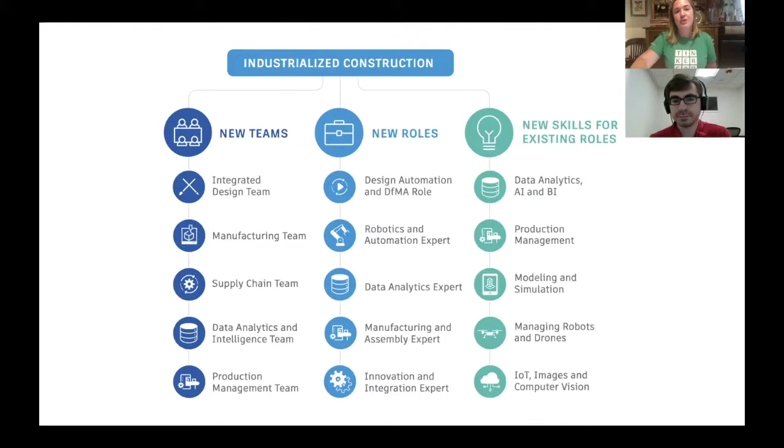Even one of the themes that is a consistent thread throughout this series is the idea of sustainability. So also how we can integrate robotics into the construction process in order to make it more efficient, but also to have less of a negative impact on the planet. Oftentimes we can do that and create less waste, for example, by doing construction in a more controlled environment, similar to manufacturing.

This is just some more information if you're interested in how the construction industry is reorganizing itself around teams. In the future, new roles will include the convergence of design and make - thinking about those BIM models that were designed in CAD that we looked at yesterday, and also thinking not just about the design of the building itself, but also the design of how all those different technologies are going to be incorporated in different stages of the construction process.

From the integration of robotics to thinking about managing the drones that might be monitoring the construction site for things like safety. So just thinking about an integrated plan for the whole process - a manufacturing team that might be working on creating components to buildings offsite, and then also the supply chain team would need to think about how you could move those components to the actual construction site, and also where we are sourcing the materials for the buildings we're creating.

The production management team - so again, those who might be collaborating with robots in order to make buildings, those who might be flying the drones, managing the drones.

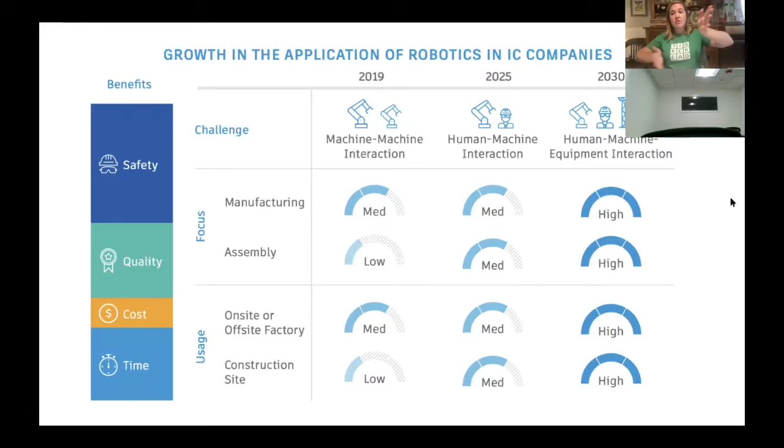By 2025, when a lot of you guys might be just recent graduates from college, there will be more human-machine interaction. So that skill of actually being able to collaborate with technology and with robotics, and collaborate even with automation, to see automation as a design partner, is something that is going to be important in the future. And then as we get into 2030, you see that a lot of these trends are actually becoming more commonplace, both on-site and off-site, both in the manufacturing pre-construction and also the assembly. In addition to that, thinking about ways that we can integrate robotics, humans, and some of the construction equipment itself, such as cranes, for example.

So I'm going to actually play Khalif's film now. This is from an earlier iteration of this series. Khalif and Russell again work together at Mass Robotics. Khalif is actually the director of education at Mass Robotics. So here is some of his broadcast from May.

We're beginning soon, but in the meantime, go ahead and start the warm-up activity: designing some kind of robot that would help you solve a problem in your life. It doesn't have to be a big problem, it can be a very small problem if you'd like. But the key is to find something specific that you think is better done when you don't have to do it. When Russell comes back, we'll continue to go over this warm-up activity as well. Also, I'd encourage you to write it down. Try to get good detail in there if you'd like, sketch it if that helps you. I'll be getting back to that later, so it's good to have that in advance.

Can you design a dishwasher? You can. Later on, we're going to talk a bit more about what is and isn't a robot, and does it even matter? So we'll be talking about dishwashers in particular.

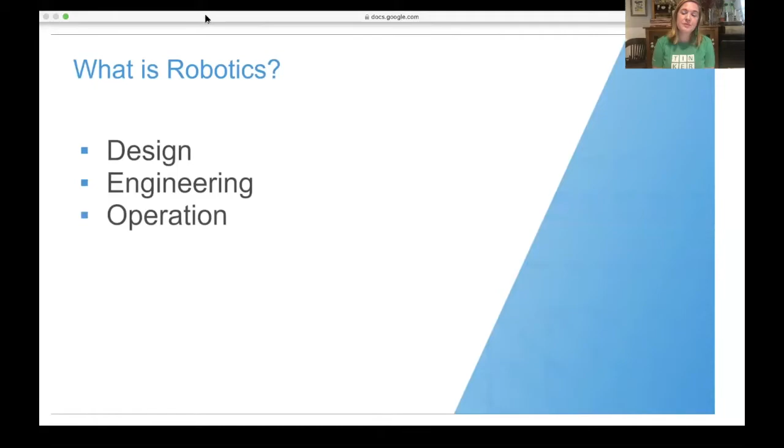So once you have the design, you've engineered it, right? Someone actually has to operate a lot of robots. Some robots work on their own and others work in tandem with humans. So the ones that work with people actually have people working alongside them in order to operate it. And also the application, so installation and such, all has to be done by someone. So these are all things within the fields of robotics and automated systems.

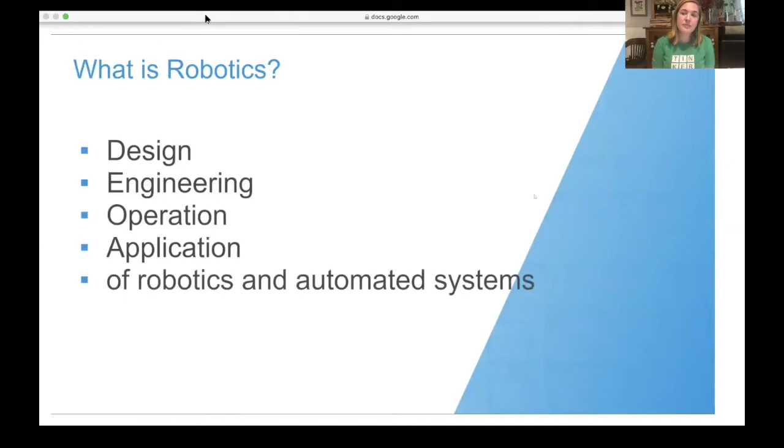I won't get too much into the difference between a robot and an automated system, but just know that there is some nuance there. So what is a robot? A robot is anything that can sense the world around it, takes that data, computes it, and then actuates it in some way.

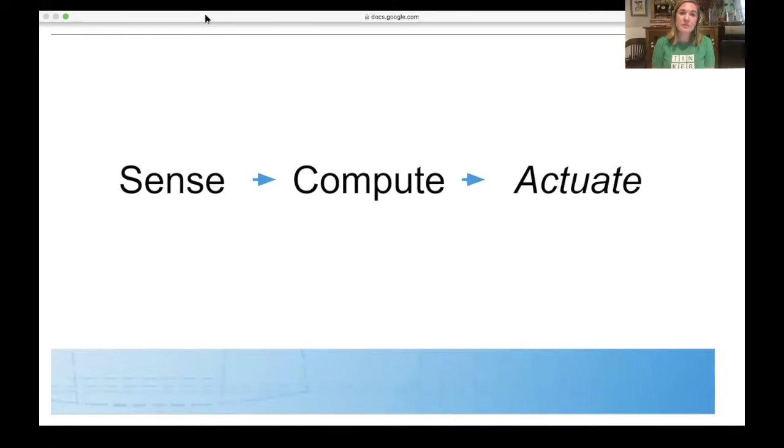The term actuates, as we use it in robotics, really just means moving things. So that's something like an arm, right? That's actuation. In a car, a wheel. Something which actually moves. It's not just a digital computer thing—it has to functionally move something somewhere. Otherwise, we can't quite call it a robotic system.

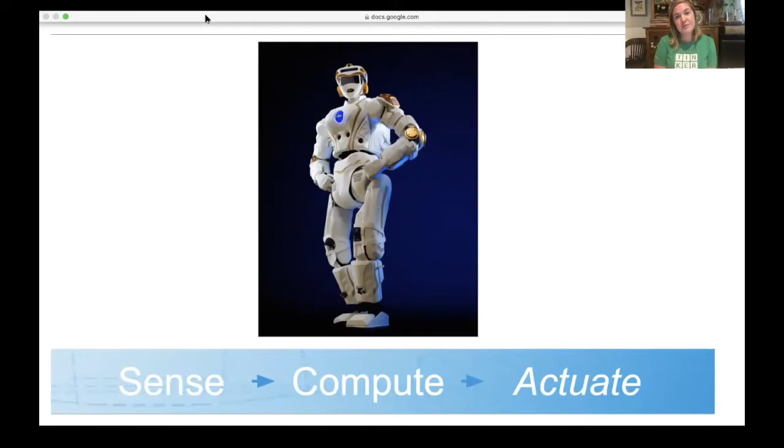So I want to go over some robotic systems. This one right here is the NASA Valkyrie robot. We have one in mass robotics. And this looks a lot like what I imagine many of you think of when you think robot.

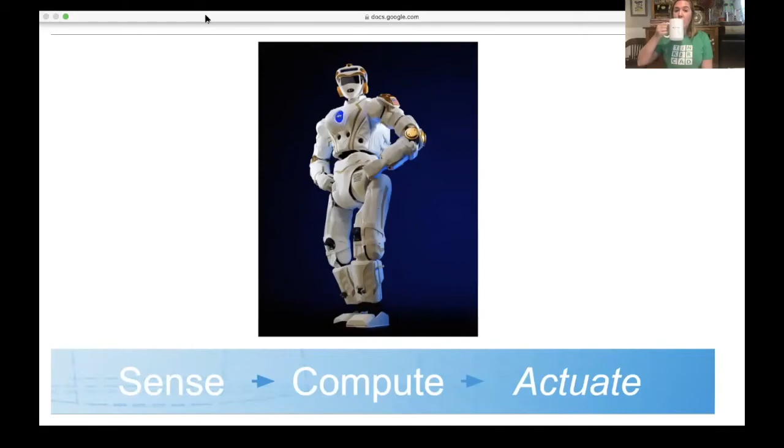We have an idea when we think of robots that comes from a lot of media. And while this is broadening these days, this still is a trademark version of a robot.

But even this robot has to follow the same rules that we gave for all robotics. So it has to have some way to sense the world around it. In this case, it has infrared sensors, which are a type of sensor that can sense distance by sending out two different signals—one that sends out a signal, and one that will receive it. Using that, it allows it to figure out the distance between objects.

And then this one also has cameras on its front and on its back. Important thing to notice is that while it looks a lot like a human, it has cameras located in the torso area. And this is one of those things where, at first glance, you might think you want to put the cameras in the head, right? That's where the vision is. But they're not humans.

We're not bound by the same laws that humans are when we design a robot. So a camera can be put wherever it's best utilized. You could put a camera on the robot's hand if that would help it serve its function. In this case, it has some called hazard cameras in order to sense danger.

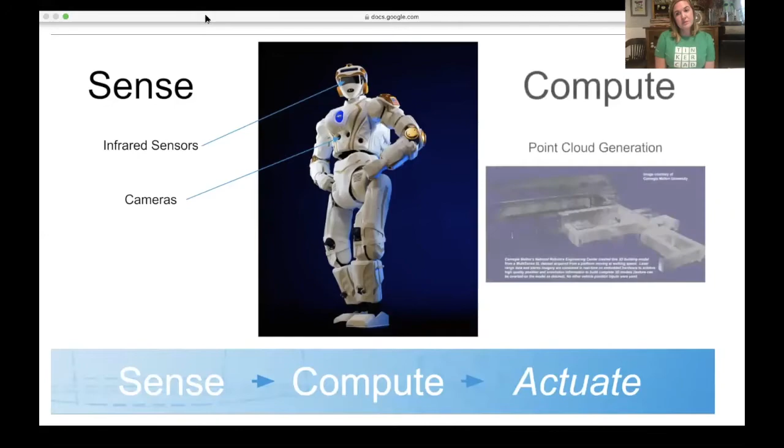So the compute side is the interesting part for this particular robot. The infrared sensors—it's a little more complicated than just an infrared sensor, but the idea is it can take the data from the distances objects are from the robot and turn those into points that can create full 3D models of spaces.

So the image you see right here is one from the sensor being used in the NASA Valkyrie robot. It can map a space as it's moving through it, giving it eyes kind of like what we have. And then the actuation is the legs, the arms, the wrists, the head.

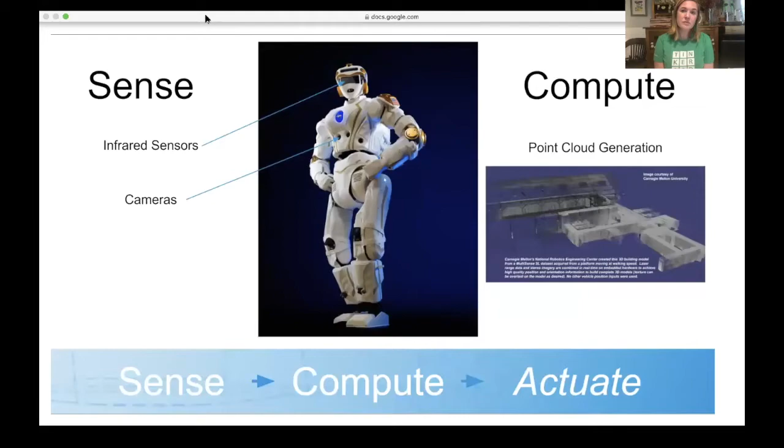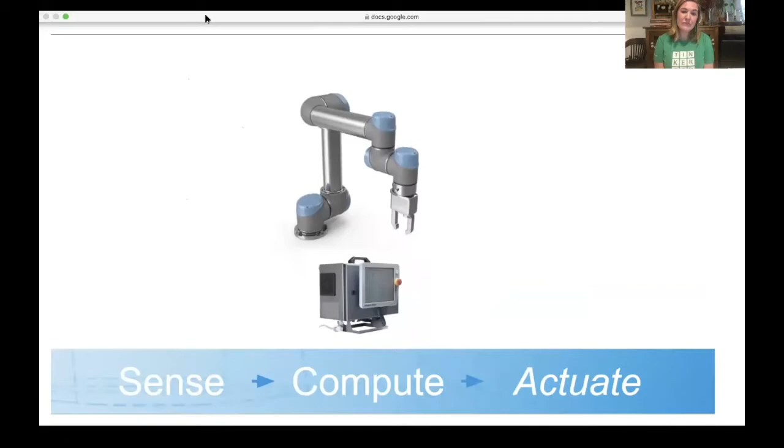Now this is a manufacturing robot made by Universal. At first glance, we might think, okay, I can see the actuation—it has a whole bunch of joints. And you can see this actually has more joints than a human arm.

So you have the joint at the bottom, the joint at the middle section, then there are a whole bunch around the arm, around the hand. But even this type of robot has some types of sensors. This particular one might use a force torque sensor. Now that sounds super fancy, but all it really means is it gives the robot a sense of touch.

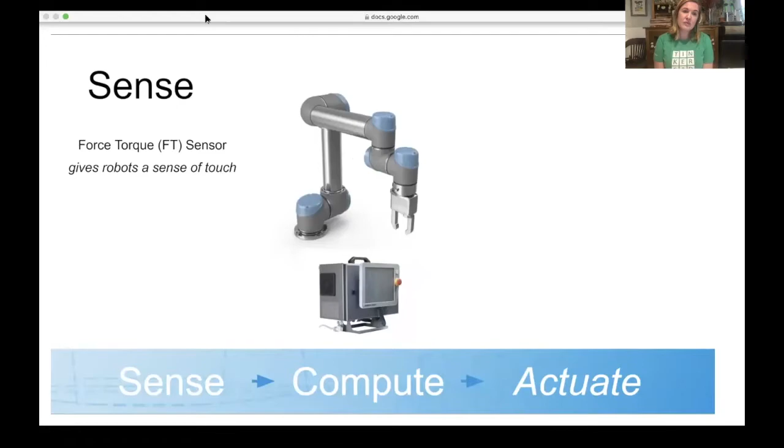But a sense of touch doesn't mean anything unless you have something you want to do with it. So the compute for this one is a control box that you can see at the bottom, and it will take the data from that force torque sensor and uses it in some way based on how we program it.

So an example of why we might want this kind of sensor is, say you wanted to pick up an object. Now if you wanted to pick up a rock, you could use any kind of force. You could just hold it in your hand. It's not going to go anywhere, it's not going to break. However, if you wanted to take the same robot and pick up an egg, it needs a much more delicate touch. Without the proper sensor, the same robot would just crush that egg. And that's one of those problems that is surprisingly difficult, even right now, to have robots that have some kind of dynamic understanding of what they're holding.

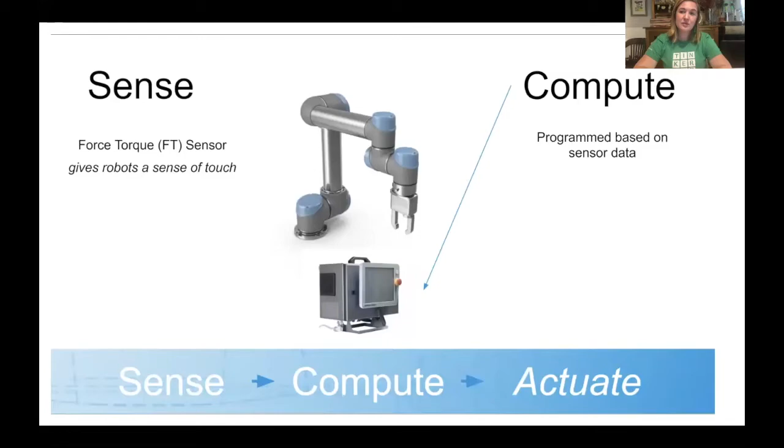So I want you guys to raise your hands if you think an automatic door is a robot. So y'all can raise your hands now. I'll pause. So who thinks an automatic door is a robot? How are we doing, Russell? Because I can't see - it looks like we have 55, 56, 58, 60. Yeah, a lot of people, the majority of people.

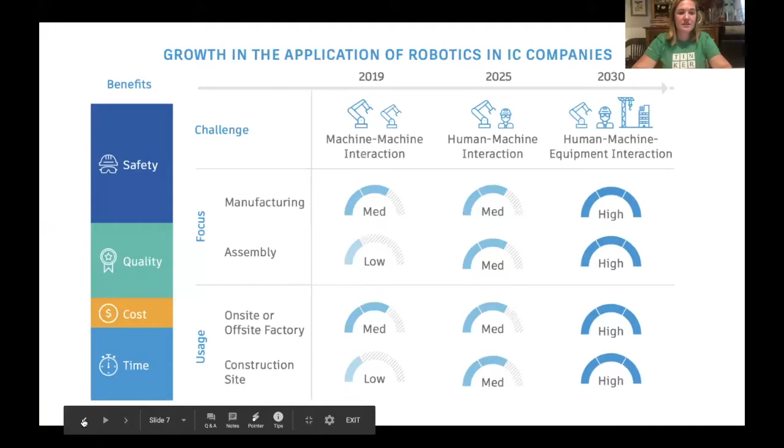All right, let's see what Khalif has to say. Oops, I just messed up the video. Okay, I went to the next slide. Again, where were we? All right. And I just did it again. I'm sorry, guys. We're beginning soon.

All right, so we took our poll here already. Looks to me like we have about half of us think an automatic door is a robot. If you say it's a robot, I want you to go in the Q&A and tell me why it's a robot. Remember to use the sensing, computing, and actuating as our criteria. So you can do that in the question and answer as well.

I'm just going to try not to be fancy and touch the recording. Right?

So a lot of the answers are: it has a sensor, so it knows when someone's near it, and then it moves itself, it opens. And so yes, automatic doors can be classified as a robot. Even though we don't necessarily think of it as a robot, the fact that it has some way to sense the world around it via a sensor at the top - and you guys had similar stuff, similar sensors - at the bottom, that senses when someone steps near it. It uses that to sense. And then again, sensing data on its own doesn't do a whole bunch. So something in there has to compute: okay, when there's someone nearby, open the doors, and that's the actuation. So that qualifies under this definition as a robotic system.

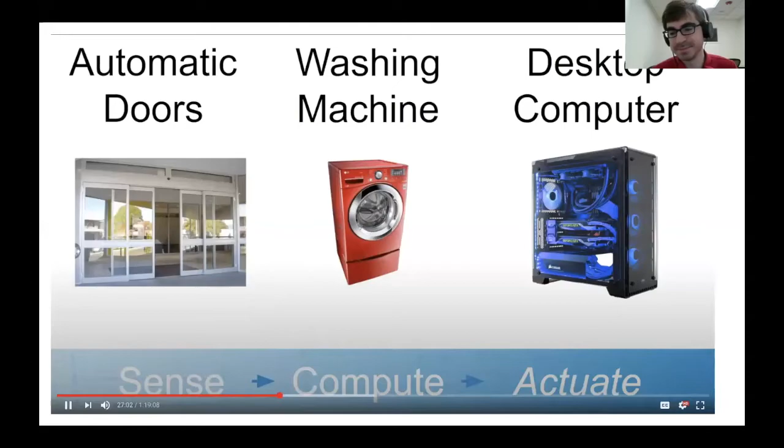That's within the cooling system of the computer. So while you can call it a robot, and it fits our loose definition of a robot, those things in and of themselves aren't really the primary function — using a desktop computer, opening up applications and such, those cooling elements are kind of secondary systems to the computer. So we can call it a robot, we can call it not a robot. Ultimately it doesn't matter a whole bunch, because robotics isn't just about whether something is a robot — it's also automated systems. Those are the two things that fall under the robotics term. So a lot of things in a washing machine or a desktop computer we can call robots or we can just call automated systems. They're two different terms that both help you understand what robotics is.

There's one answer here that says, 'but a computer doesn't move, right?' Same thing with the washing machine. I want to clarify that actuation doesn't always mean moving in space. A fan has a moving element, same thing with the washing machine that tumbles around. So they qualify as actuating, which is why we use that term as opposed to just 'move.'

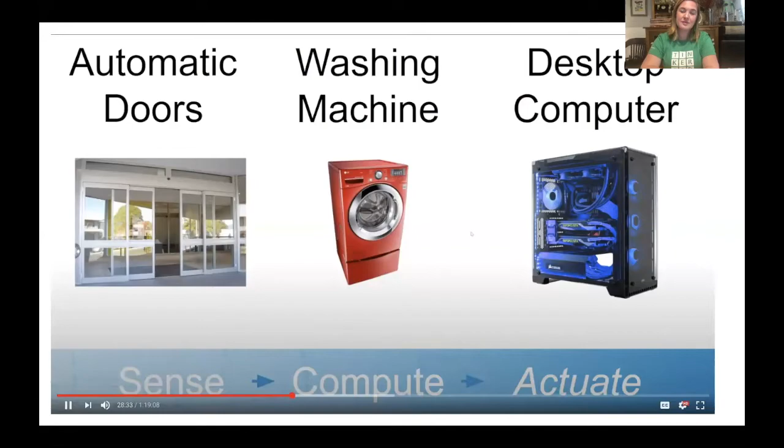So why use a robot? Why do we make these robots and design these automated systems?

Could you just pause here really quick? I'd like to add — the definition, even among roboticists and people like me, is pretty loose; everybody has a slightly different definition of robot. I think a good way to say it is that if something has any sensing whatsoever and also takes action on that sensing, then it technically is a robot. So like an automatic door — it's a door, you wouldn't say 'hey look at this robot door,' it's just a door, but technically it's automation.

I think one of the reasons to talk about this is that not everybody can just make these magical robots that walk and talk — it doesn't always make sense and isn't effective. So looking at careers or projects involving automation is really interesting, and it's basically the same thing as robotics, just in a way some might call less glamorous. A lot of people think 'oh, you're just making things happen automatically,' but you're helping people, making things happen more effectively. Take a robot that cleans the ocean — if it's just a ball that absorbs things, senses them, and then spits them out or degrades them, who cares if it has googly eyes?

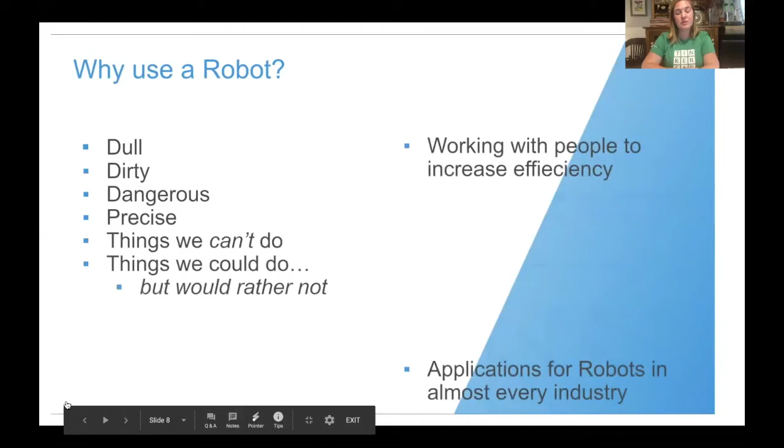The example I have here is the robots used at Amazon. These robots are a lot of fun—if you've ever seen robots that take packages around, or people put a parcel on a robot and it flies around, that's cool. Amazon just takes it one step further. Their system has a little orange robot at the bottom that will pick up an entire shelf of goods and bring it to a person, who will then pull out the item you ordered before they ship it off. So instead of it being one thing at a time, they'll just bring a whole shelf over, which is super cool.

Using this understanding of robots, we can see there are a lot of applications for it. It hits almost every single industry in some way.

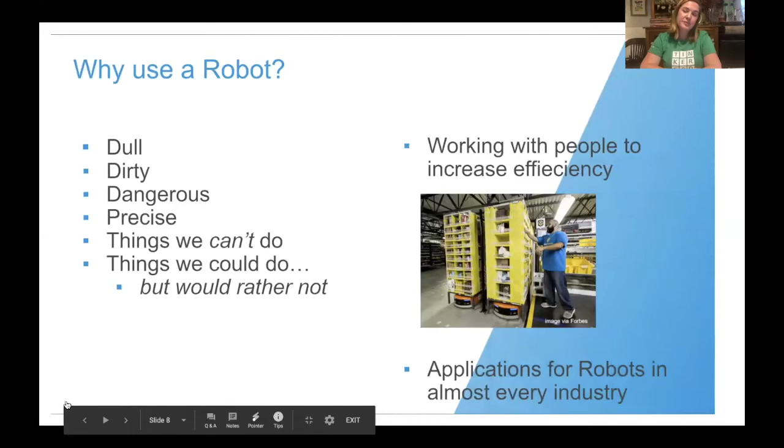If you guys have any questions, now is it. All right, so I think it's a good time to pause. We have about 13 minutes or so left, so I figured this would be a good time for us to just talk, and Russell can talk a little bit about his background in robotics. I'm going to stop sharing the screen so I can see the comments. But Russell, anything interesting that happened in the comments while Khalif was presenting virtually? This is a virtual experience with a virtual presenter, which is cutting edge. Yeah, it's Inception over here.

I saw some questions about cost effectiveness of robots. That's very important—I think that's another factor that leads to a lot of robots being created: how can you save money with robots? It's also interesting, because I'm sure everyone has seen the Boston Dynamics big dog robots in all those YouTube videos, and it's so cool, scary or whatever you think about it. But when you say, oh cool, I want one of those, how much does it cost? It's like $75,000 for nothing—just no sensors. Well, I mean it has sensors, but no advanced mapping and things that, if you're a researcher, you'd be into. So it's like maybe $100,000 for that robot.